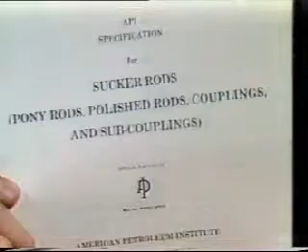First, the composition, strength, and variety of rods that are available. And second, the manner in which a rod string is designed so that it is able to withstand the loads placed on it. In each case, we shall refer to the API standards or specifications to guide us. In API Specification 11B, we find the fabrication specifications for sucker rods, including pony rods, polished rods, couplings, and subcouplings.

In reviewing this document, you will see that sucker rods are usually made in 25-foot lengths, except in California, where they come in 30-foot lengths. The 6 standard rod sizes are 1/2, 5/8, 3/4, 7/8, 1 and 1 1/8 inches in diameter.

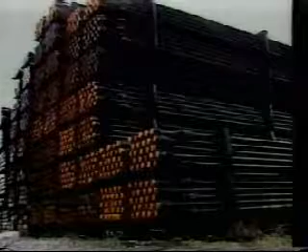Rods are normally made of steel with a composition of iron exceeding 90%. Other elements are added to the steel alloys to add hardness, reduce oxidation, and combat corrosion.

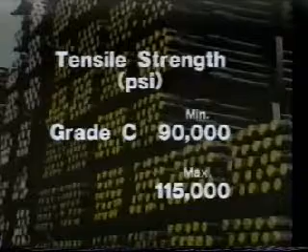The choice of sucker rods is essentially a choice between API Grade C rods, which have a minimum and maximum tensile strength of 90 and 115,000 psi, and Grade D rods, which have limits of 115 and 140,000 psi. Tensile strength refers to the maximum load that can be sustained by the rod.

It has become standard practice to run Grade D rods, except where corrosion is severe or where there is concern with regard to H2S embrittlement.

A higher tensile strength rod has been introduced which may be used in special applications. All these types of rods must be handled with care. If damaged, they may lose their high strength properties.

Fiberglass rods were introduced in the early 70s and are only now gaining acceptance. They are appealing because they weigh about 70% less than steel rods and are less prone to corrosion.

In addition to the environment to which rods will be exposed, we must be careful not to exceed the maximum allowable rod stress. In order to calculate the maximum rod stress, we use the modified Goodman equation, or as seen in many publications, the modified Goodman diagram.

The equation states that the allowable rod stress, S sub A, is equal to 0.25 times the minimum tensile strength of the rod, T, plus 0.5625 times the minimum rod stress, all multiplied by the service factor, SF.

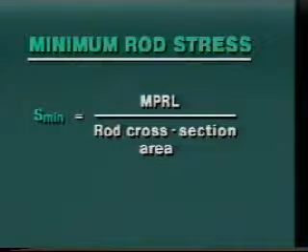If we know the API grade, then we have a published value for T. The minimum rod stress is either estimated for our proposed application or measured directly. We shall see later that it is equal to the minimum polished rod load divided by the cross-sectional area of the rod. The service factor depends upon the environment in which the rods will be placed.

As we see here, it will have a value of 1.0 for API grades C and D rods used in non-corrosive environments, but values of less than 1 for saltwater and H2S environments. Note that the service factor for corrosive environments is lower for grade C than it is for grade D rods.

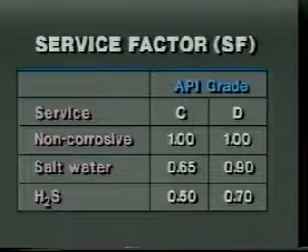We may use the modified Goodman equation to calculate the maximum rod stress for a grade C rod in a saltwater environment where the minimum stress, S min, has been calculated to be 10,000 psi. T, the minimum tensile strength, is 90,000 psi, and the service factor for saltwater for grade C rods is 0.65.

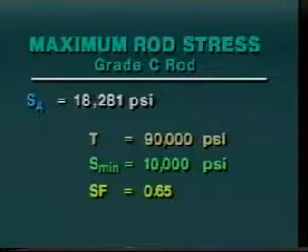Using the modified Goodman equation, we find the maximum allowable rod stress to be 18,281 psi. In general, maximum allowable rod stresses under working conditions should not be higher than 30 to 40,000 psi. The newer high tensile strength rods are rated at 40 to 50,000 psi in non-corrosive environments.

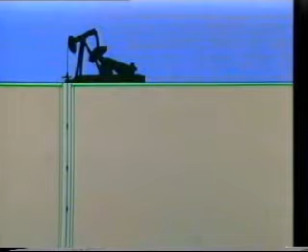So far, we have discussed the design of a rod string of a single diameter. However, the most accepted way of designing a rod string longer than 3,500 feet is to use a tapered string. That is, to have several different lengths of rods of different diameters, with the largest diameter rod at the top and the smallest at the bottom.

This tapered string may consist of as few as 2 and as many as 4 different size rods. The fundamental design criterion used for a tapered rod string is that the string have the same unit stress at the top rod of each section.

That is, the rod loads in the top rod of each section, divided by their respective cross-sectional areas, are equal. This provides for a safe design, even in the event that some corrosion pitting takes place. In order to select the appropriate tapered rod string for a specific well, we turn to the API design tables.

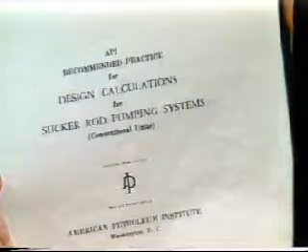These tables are published in the API Recommended Practice 11L, referred to as RP11L. A copy of this publication is contained in your manual. It contains the fundamental design calculations for sucker rod pumping systems, one that we shall refer to quite frequently.

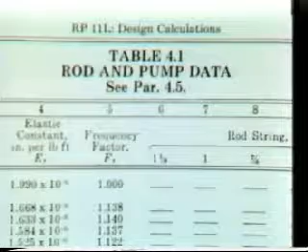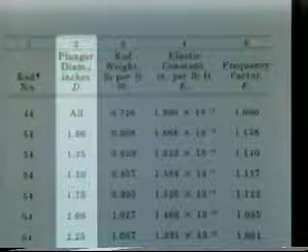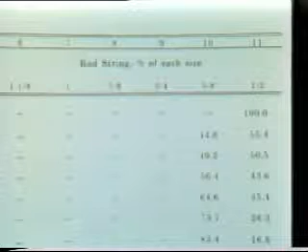If we turn to page 7 of that manual, we see tables that provide us with the appropriate tapered rod string design. In the first column is the API rod number designation. In the second, the pump plunger diameter in inches. In the third, fourth, and fifth, we see certain rod constants. In columns 6 to 11, we see the percentage of each diameter of rod that should be used for a specific API rod number designation.

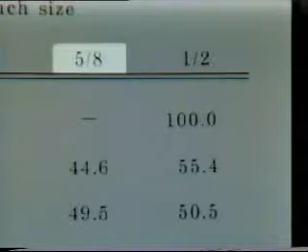For example, if we have a plunger diameter of 1.06 inches and select API rod number 54, looking to the right-hand side we see that 44.6% of our string should consist of 5/8-inch rods and 55.4% of half-inch rods.

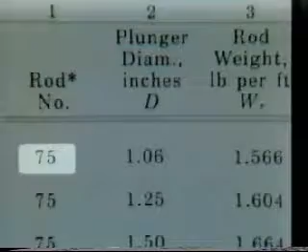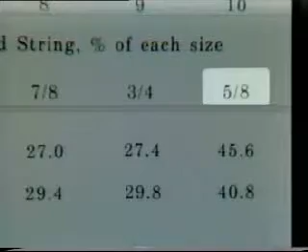Alternatively, we might select API rod number 75 for the same diameter plunger, and here find that 27% of our rod string should have 7/8-inch rods, 27.4% with 3/4-inch rods, and 45.6% with 5/8-inch rods. This would provide us with a different rod makeup and different rod characteristics than the first design, but both would meet our design criterion.

As we shall see shortly, the key to the API design procedure for pumping wells is one of trial and error. This includes the design of rods. We initially select a tapered rod string design, carry through our calculations, and see whether the rod stress placed on the rods exceeds the maximum limits for the class of rods used. If it does, we must select other rod number designations until we find one which will satisfy design limitations. For the 1.06-inch diameter plunger, we found two designs that might be used.

Converting the percent values to actual rod lengths, the first design for a 5,000-foot well would consist of 2,230 feet of 5/8-inch rods above 2,770 feet of half-inch rods. Since rods generally come in 25-foot lengths, we would adjust these two numbers to 2,225 and 2,775 feet respectively.

For the second design, we would end up with 1,350 feet of 7/8-inch rods at the top, followed by 1,375 feet of 3/4-inch rods, and below that, 2,275 feet of 5/8-inch rods.

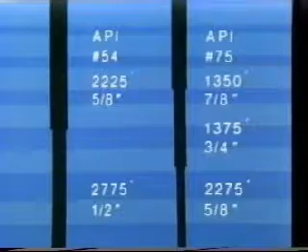Now that we know the basic properties of rods, we should turn to the calculation of rod loads during pumping operations. We must know these rod loads in order to design our surface facilities. Later we shall see that rod loads are measured at the surface during production operations in order to learn what is occurring downhole at the pump.

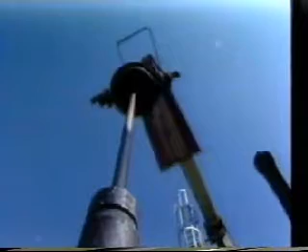As we consider the motion of this polished rod and the action of the valves in the subsurface, we realize that the load it must carry varies during the pumping cycle. Its maximum load occurs shortly after the beginning of the upstroke. When the traveling valve closes, the polished rod must carry the full weight of the fluids, the rods, and the added inertial effects that occur when the motion of the rods is reversed.

The minimum load on the polished rod occurs shortly after the polished rod begins its downward motion and the traveling valve opens. At that point, the rods no longer carry the fluid load and the inertial effects are reversed, thereby reducing the total rod load to a value below the weight of the rods in the produced fluids. Let's see what difficulties arise when we attempt to calculate the maximum and minimum polished rod loads.

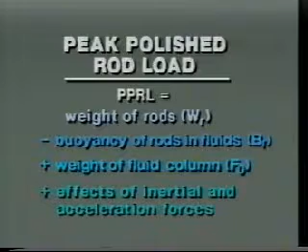We begin with the peak polished rod load, or PPRL, which must be equal to the weight of the rods in air, minus the buoyancy of the rods in the produced fluids, plus the weight of the fluid column supported by the plunger area, plus the effects of the inertial and acceleration forces on the rods.

Calculating the weight of the rods in air is quite straightforward. We look up the API tables for the rod design we just referred to, find the average weight per foot of rods in our tapered rod string, W sub R, and multiply that by the total length of the rods in feet, L. The average weight of the rods is 1.566 pounds per foot, and the length of the string is 5,000 feet, so the weight of the rods in air, W, is 7,830 pounds.

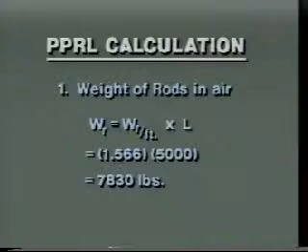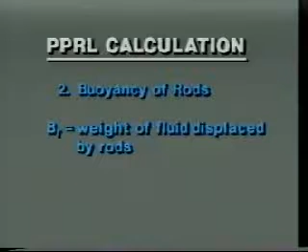The second term, the buoyancy of rods in the produced fluids, is equal to the weight of the fluids that the rods displace. We may calculate this term by saying that it is equal to the density of water, 62.4 pounds per cubic foot, multiplied by G, the specific gravity of our produced fluids relative to water, multiplied by the weight of the rods in air, W, divided by the density of the steel. The density of steel is equal to about 488 pounds per cubic foot. The buoyancy, then, is equal to 0.128 multiplied by G multiplied by W.

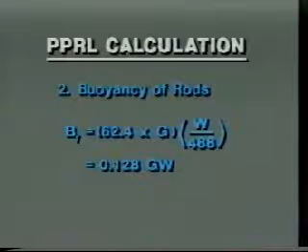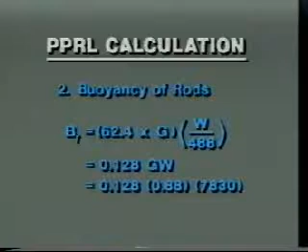If we assume the density of our produced fluids to be 55 pounds per cubic foot, giving us a value of 0.88 for G, then, as we see here, the buoyancy effect is equal to 0.128 multiplied by 0.88 multiplied by 7,830, the weight of the rods in air, or 882 pounds.

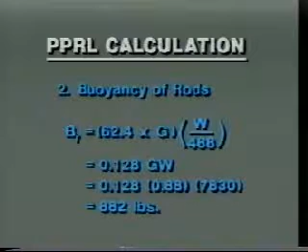We obtain a value for W sub RF, the weight of the rods in fluid, by subtracting the buoyancy of the rods from their weight in air. It is equal to 6,948 pounds.

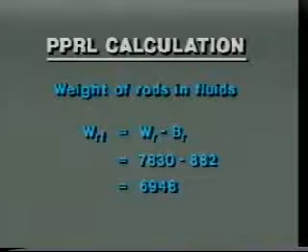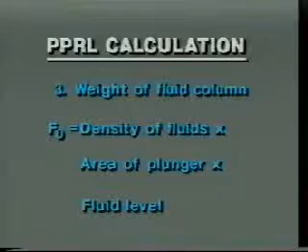F sub 0, the weight of the fluid column supported by the net plunger area, is equal to the density of the produced fluids multiplied by the net plunger area multiplied by the height of the static fluid level. The net plunger area is equal to the area of the plunger minus the area of the rods. The suggested API procedure, however, disregards the area of the rod in this calculation. We shall do likewise.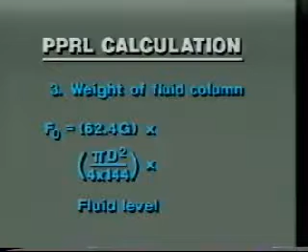Filling in, then, we have the density of the fluid as equal to 62.4 multiplied by G. The area of the plunger in square feet is equal to pi multiplied by the square of the plunger diameter in inches divided by 4, multiplied by 144 to convert square inches to square feet. The fluid level is given the designation H in feet. The units are consistent, and F sub 0 will be in pounds. Collecting terms gives the general equation for F sub 0 in these units.

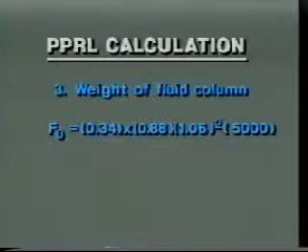For our sample case, G is equal to 0.88. The plunger diameter is 1.06 inches, and we will assume the static fluid column height to be equal to the pump depth of 5,000 feet. This gives a fluid column weight of 1,681 pounds.

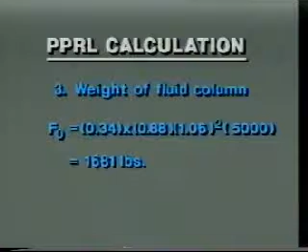We now know that by summing the first three terms, we obtain a polished rod load of 8,629 pounds, plus the effects of the inertial and acceleration forces.

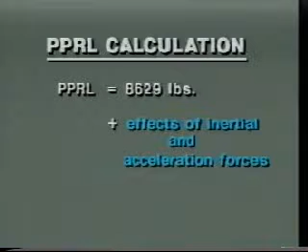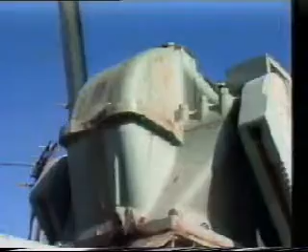The behavior of the polished rod is very complex, and predicting the effects of these forces can be difficult. Not only does the rod string stretch and contract in response to a cyclic motion which is not simple harmonic, but also to a crank and pitman motion which is different for each different type of pumping unit. Because of the elasticity of the sucker rod system, stress waves run up and down the rod in response to the various forces that can affect the rod.

There are several alternatives for including the effect of inertial and acceleration forces on our polished rod loads. The alternatives are, first, to make simplifying assumptions about the behavior of the rod and the pump motion. This has often been done in the past, but need no longer be done today.

A second option is to use empirical correlations that have been prepared on the basis of many repeated observations of pump behavior. This is the API design procedure. It is based on work done at the Midwest Research Institute, where rod pumping systems were simulated on an electronic analog computer. By simulating a wide range of pumping conditions, the Institute was able to develop correlations which can be used to predict polished rod loads.

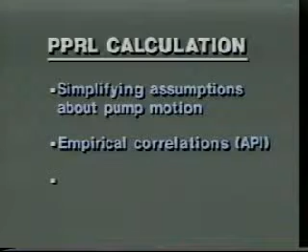A third option that may be used to calculate rod loads is to solve the nonlinear partial differential equations, which represent the behavior of the rod string. Gibbs, originally on his own and later with Neely at Shell, solved these types of equations in an effort to analyze pump operation rather than pump design. Their work is based on the use of a known value of peak polished rod load at the surface in order to calculate the behavior of the pump in the subsurface.

In order to calculate the peak polished rod load without making simplifying assumptions then, we are left with the second option, the one followed in the API design procedure. Because this procedure is fundamental to the design of our surface pumping system, we should take a few minutes to learn the empirical correlations and the way in which they are used to calculate polished rod loads and other values needed in our pump design.

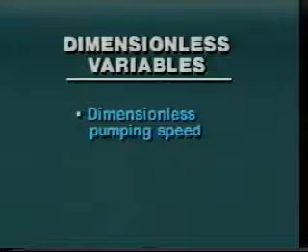Experimental work conducted at the Midwest Research Institute on sucker rod pumping, later adopted by the API, consisted of numerous experiments run on an analog computer, representing a wide range of pump operating conditions. The results are correlated on the basis of two dimensionless variables. The first variable is the dimensionless pumping speed, and the second, the dimensionless rod stretch.

The dimensionless pumping speed is equal to N divided by N sub 0, or N divided by N sub 0 prime.

The first dimensionless variable is equal to the pump speed in strokes per minute divided by the natural frequency of the string. The alternative dimensionless variable for pumping speed is equal to N over N sub 0 divided by F sub C, the frequency factor of the rod string.

Note that F sub C is equal to 1.0 for an untapered string and is greater than 1 for a tapered string. In the event that an untapered rod string is used, the two dimensionless variables are equal. We shall see very shortly that for several correlations, one of these variables is used, and for others, the other is used.

N sub 0 is equal to A divided by 4L. A is equal to the speed of sound in steel rods, and is customarily given a value of 16,300 feet per second.

The dimensionless ratio, then, is equal to NL divided by 245,000. N over N sub 0 prime is obtained by dividing this term by F sub C, the frequency factor of our rod string. Values for the frequency factor are found in the API tapered string design tables, as we shall see shortly.

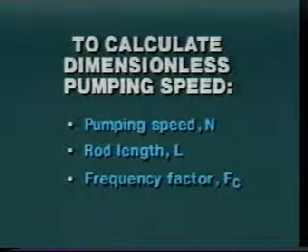We note that for a given or assumed pumping speed, rod length, and frequency factor, we may calculate a value for this dimensionless variable. Before doing so, we should understand the second dimensionless variable of importance, the dimensionless rod stretch. It is equal to F sub 0 over SK sub R.

F sub 0, as we saw earlier, is the static fluid load in pounds. Note that S is the polished rod stroke length in inches, and that K sub R is the spring constant of the rod string. Its value is also given in the API rod design tables. It represents the load in pounds required to stretch the rod string the length of the polished rod.

We see then that the dimensionless rod stretch term represents the rod stretch caused by the static fluid load, given as a fraction of the polished rod stroke length. For example, if the term has a value equal to 1, then the rod string will stretch an amount equal to the length of the polished rod stroke.

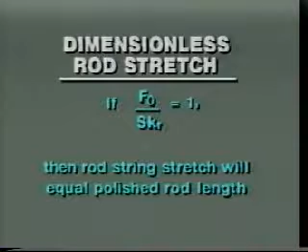We note here again that for a known or assumed polished rod stroke, the value of this dimensionless variable may be easily calculated. We should add one word of practicality at this point: it has been observed by a number of specialists that under-travel and over-travel of the pump can be prevented if N over N sub 0 prime does not exceed 0.35, and F sub 0 over SK sub R does not exceed 0.50.

With these known values for the two dimensionless variables and the results of the work done at the Midwest Research Institute, 5 correlations were published and are available in API RP11L. These 5 correlations allow us to develop systematically the API design for a pumping unit.

The first 3 correlations affect the rod and pumping system, specifically the plunger stroke, the peak polished rod load, and the minimum polished rod load. The last 2 are used to calculate peak torque and polished rod horsepower.

Let's look at these correlations by referring to an example. We shall do so using the data from the sample problem we have been discussing.

The given data includes a fluid level, H, and pump depth, L, of 5,000 feet, a tubing size of 1.9 inches. The tubing is anchored.

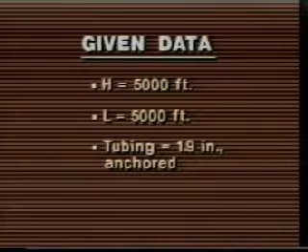We assume an API sucker rod number 75, consisting of 1,350 feet of 7/8 inch rods, 1,375 feet of 3/4 inch rods, and 2,275 feet of 5/8 inch rods will be adequate for our needs. These grade D rods have a maximum rod stress of 34,000 psi.

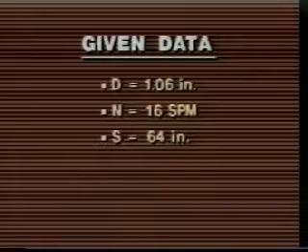The plunger diameter D is 1.06 inches, and we shall assume for preliminary design purposes that the pump speed N is 16 strokes per minute, and that the polished rod stroke length S is 64 inches. G, the specific gravity of the pumped liquid, is 0.88.

A quick calculation tells us that these data will provide a pump displacement of about 135 barrels per day. Using inflow performance calculations discussed in Module 102, we expect the production to be about 100 barrels per day. Our design then must satisfy this objective and allow a little downtime for maintenance.

We see here the first correlation, the one which allows us to calculate the plunger stroke length. On the left, we see the term S sub P over S, the bottom hole pump stroke length divided by the polished rod stroke length.

This ratio reflects the effect of rod stretch on the effective rod stroke length. On the horizontal axis, we see the dimensionless pumping speed, N over N sub 0 prime, the first dimensionless variable, and on the graph itself, we see different curves for different values of the second dimensionless variable, that for rod stretch. Since we know or can calculate the values of these two dimensionless variables, this correlation may be used

to calculate a value for S sub P over S. In our example, N over N sub 0 is equal to N multiplied by L divided by 245,000. For our data, this equals 0.326. N over N sub 0 prime is equal to this value divided by F sub C. For our selected rod string, F sub C is equal to 1.191, and so N over N sub 0 prime is equal to 0.274.

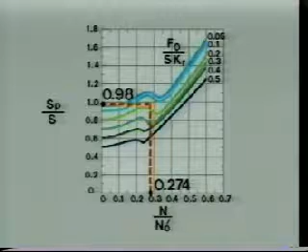If the tubing is anchored, as it is, this means that the bottom hole plunger stroke length, S sub P, is equal to 98% of the polished rod stroke at the surface. This means that for a surface stroke length of 64 inches, our bottom hole stroke length will be 62.7 inches.

If the tubing were not anchored, then we would subtract from this plunger stroke length an additional term, which accounts for the tubing contraction during the upstroke. This term is equal to the coefficient of elasticity for the tubing, E sub T, measured in inches of stretch or contraction per pound force imposed per foot of tubing, multiplied by the pounds of force imposed, F sub 0, multiplied by the tubing length, L.

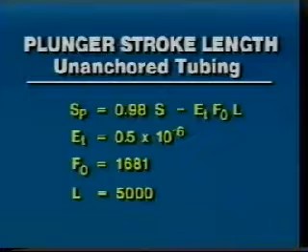Values for E sub T for standard size tubing are given in RP11L. For the 1.9-inch tubing, it has a value of 0.5 multiplied by 10 to the minus 6. With F sub 0 equal to 1,681 pounds and L equal to 5,000 feet, the plunger stroke length is reduced an additional 4.2 inches if the tubing were unanchored. In this case, the net plunger stroke would be 58.5 inches.

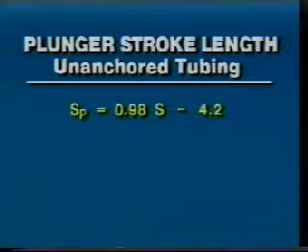We are now able to calculate subsurface displacement. We use the pump displacement expression developed earlier and are given values of pump stroke length in inches, pump speed in strokes per minute, and plunger diameter in inches to give us the pump displacement in barrels per day. In this case, it is about 131.

This more than meets our expected inflow rate of 100 barrels per day. In fact, it allows us about 20% downtime per day for maintenance. However, had it not met our production objective, we would now revise our assumed pump data and repeat the calculations. To calculate the production rate at the surface, we must incorporate the pump efficiency considerations mentioned earlier.

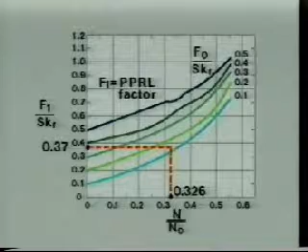Because we know the value of Sk sub r, it is possible to calculate F sub 1. Note that F sub 1 is the term which we add to the weight of the rods in the produced fluids to give us a value for the peak polished rod load in pounds. It represents, then, two terms: the weight of the fluids and the load caused by the inertial acceleration forces.

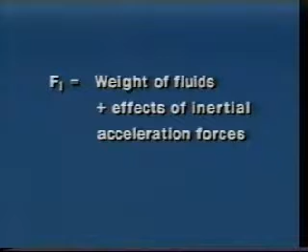The peak polished rod load, then, is equal to the weight of the rods in fluids, W sub RF, plus F sub 1. Or in terms of our correlation, it is equal to W sub RF plus the term F sub 1 over Sk sub r multiplied by Sk sub r.

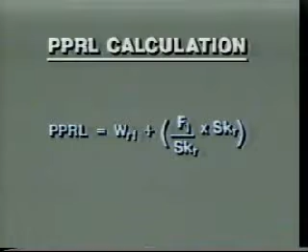For our sample problem, we remember that the weight of our API number 75 rod string in the produced fluids was calculated to be 6,948 pounds. The dimensionless term, as we just saw, is 0.37. All we need is a value for Sk sub r.

K sub r, the spring constant for our rod string, is equal to the reciprocal of the coefficient of elasticity of our rod string, E sub r, multiplied by the length of rods, L. E sub r for our rod string is 0.997 times 10 to the minus 6, and L is 5,000 feet. This gives us a value for K sub r of 200.6. With a polished rod stroke length, S, of 64 inches, we calculate Sk sub r to be 12,838 pounds.

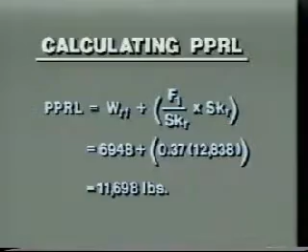Now we are able to calculate the polished rod load for our example. It is 11,698 pounds. This value represents our best estimate of what the load will be and should be used for design purposes. Under actual operating conditions, it will be different, but should not be significantly different.

Now that we know how to calculate the peak polished rod load, let us turn to the third correlation, which gives us a method for calculating the minimum polished rod load. We remember that the minimum polished rod load occurs just at the beginning of the downstroke, when there is maximum downward inertial force and the fluid load is no longer carried by the rods.

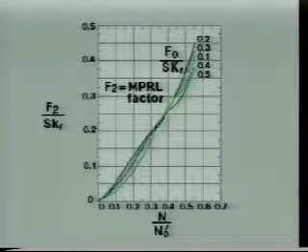In our correlation, we see once again our two dimensionless variables in their same location. But now on the vertical axis, we see the term F sub 2 divided by Sk sub r. F sub 2 is referred to as the minimum polished rod load factor. Once again, with a value on the horizontal axis of 0.326 and a dimensionless rod stretch value of 0.13, we find that the point of intersection on the vertical axis is at 0.21.

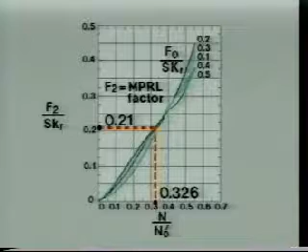Knowing the value for Sk sub r, we can calculate a value for F sub 2. This term represents the amount that must be subtracted from the weight of the rods in the produced fluids to give the minimum polished rod load. As such, it represents the inertial and acceleration force at the point of minimum load. Its calculation proceeds directly parallel to that for the peak polished rod load.

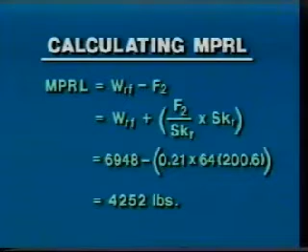We expand the term for F sub 2, then fill in all the known values on the right-hand side. In doing so, we find a minimum polished rod load of 4,252 pounds. Once again, we should point out that this value is used for design purposes and that its actual value after installation may be different.

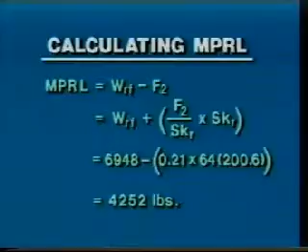We began this unit by discussing the types and grades of sucker rods and continued on to the design of sucker rod systems. We then attempted to calculate directly the peak polished rod load because we knew it was needed in order to design our surface system. We found that direct calculation was difficult, and so we turned to the three API correlations, which allowed us to calculate effective plunger length, and thus pump displacement, peak polished rod load, and minimum polished rod load.

There's a little more yet to do, but before going on to the design of the surface system, let's stop at this point and work exercises 6.6, 6.7, and 6.8.